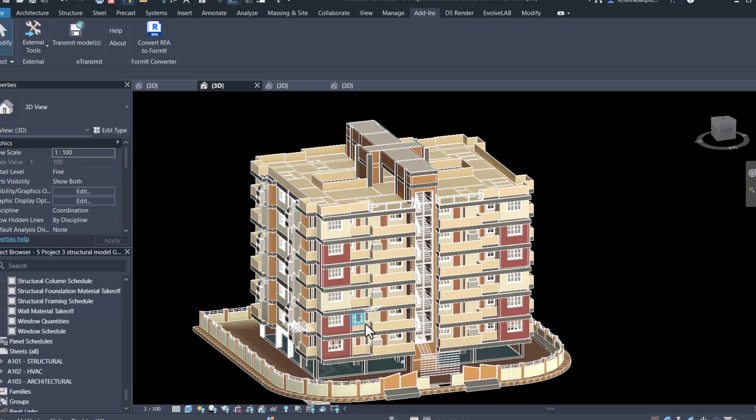You can see a simple building, a G plus 5-6 floors building, right? It looks like a very simple building, but it has a lot of detail inside it. Let's say if I show you over here, you can see that there is a footing, as well as some reinforcement. It gives you such clarity about what type of reinforcement is in this particular footing and what type of footing it is. It's an isolated footing, with PCC and with some rebar as well.

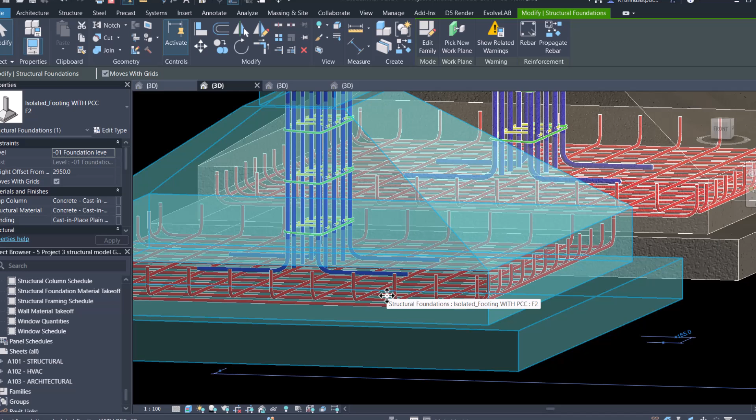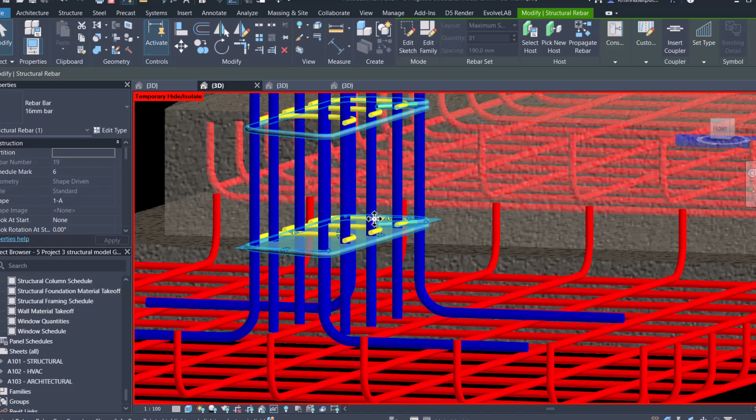I'll hide this part so that you can see it more clearly. You can see the rebar over here. If I select it, you can see that this is a 12 mm bar, with a specific color. Then this is again a rebar, a 16 mm bar. What are these? I will make this into a section box so that you can see more clearly. Have a look. These are all stirrups, 8 mm bars, or these are 16 mm bars, but with different color coding.

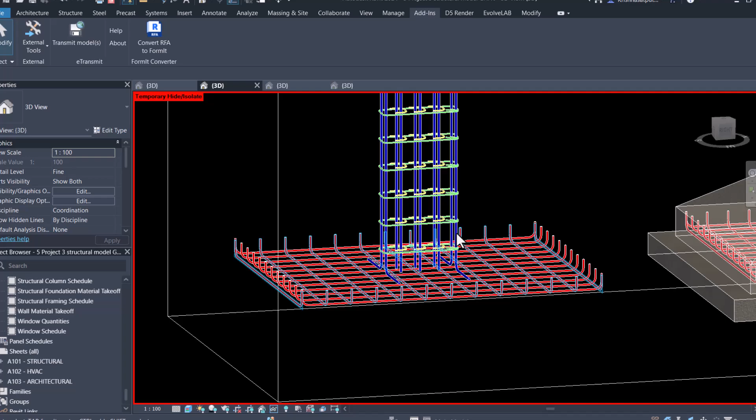So this is how you have to define it if you create any BIM model or BIM project. You need to make everything in such a detailed way that the employer knows your skill set is really applicable in the industry. It's not just a 3D model, it's a model with all the details mentioned. So let's look at this 12 mm rebar. You can even put in details like steel bar or steel bar footing base. There are so many details you can mention about any single object.

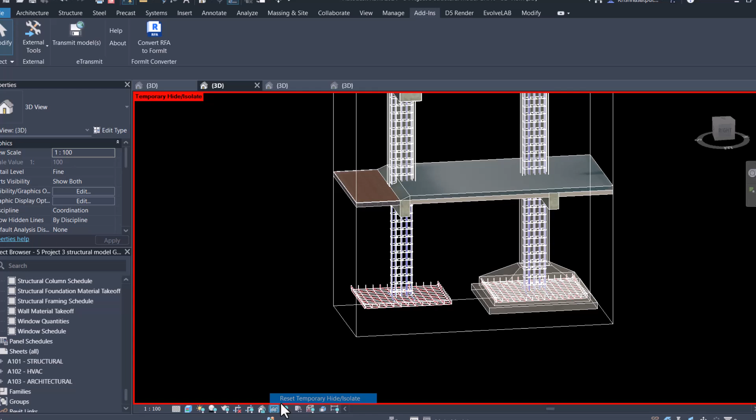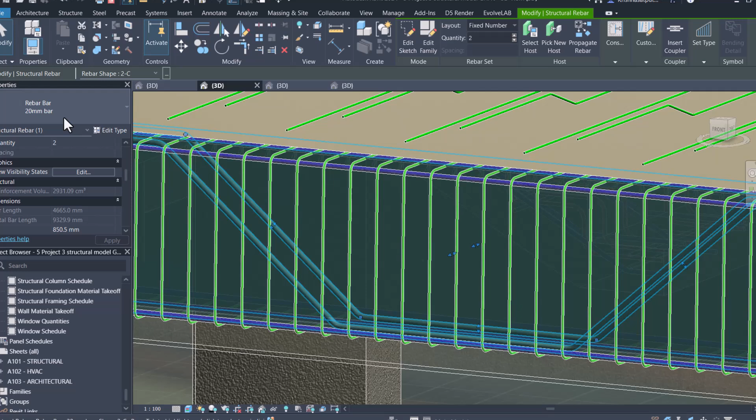Now let's look at more details in this project. I will come out of this section box. You can see there is a boundary wall, some railings over here. Then there is a beam with proper detailing, proper modeling of the reinforcement. You can see the vertical and horizontal reinforcements, and the bent up bars very clearly and precisely. If I select this bar, it shows it's an 8 mm bar. This one is a 20 mm bent up bar. If I click on this element, I can even see the size of this rebar.

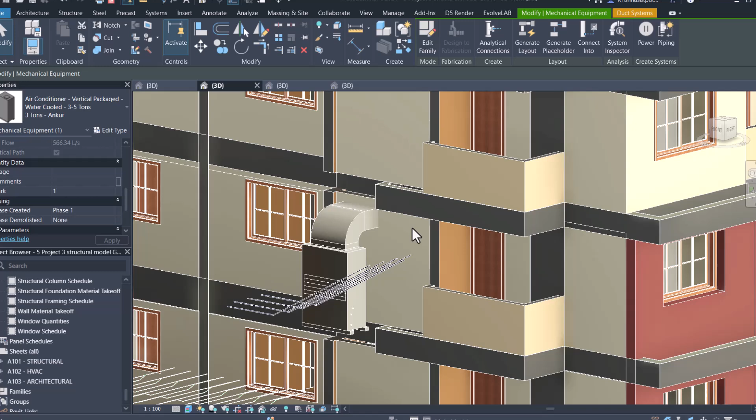Then over here, I can see that there are some ducts as well. Air conditioner, vertical. This is also a duct. It's an elbow. This is a rectangular duct. So these are the things you might need to show in your project, like the reinforcements and elements properly modeled.

If I want to see only the structural part, let's switch off every element and show only the structural part: foundation, column, framing, and the rebar as well. I'll switch it on. Now you can see only the structural part of the building, including the reinforcement rebar. You can see the staircase and the reinforcement in this staircase. Let's make it into a section box.

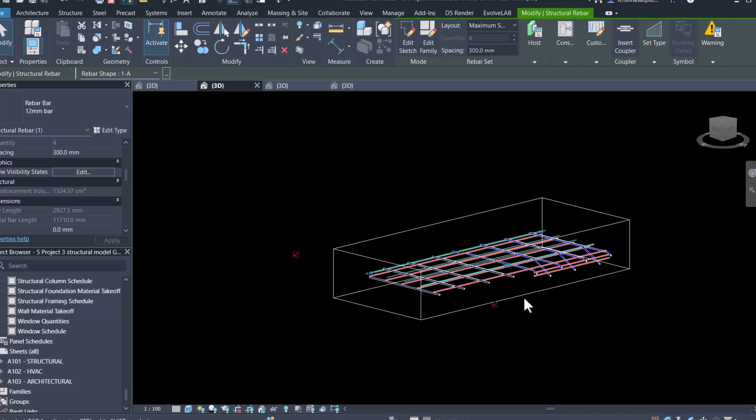You see how clearly the things have been defined over here. So in order to make a really BIM project where you are going to showcase all the details, these details are not directly embedded in the project. These details are readable from a CAD drawing.

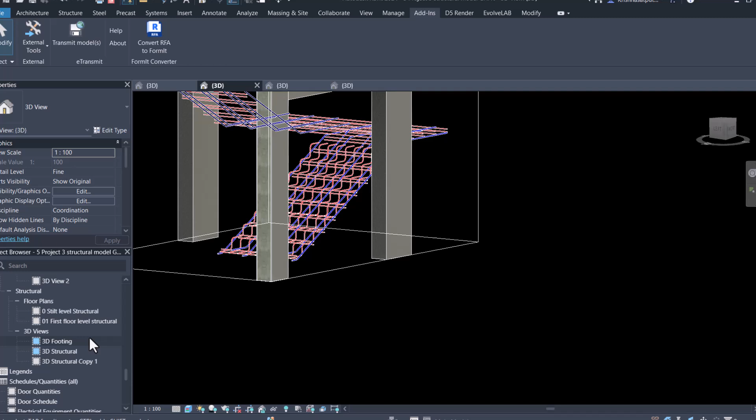So once you have a CAD drawing, the student who made this particular project used a CAD drawing to make the staircase, the reinforcements. After achieving this particular project, he has also carried out some sheet creations. So let's have a look over here. Look at the different types of sheets he has created. The structural model over here, the footing, the beams.

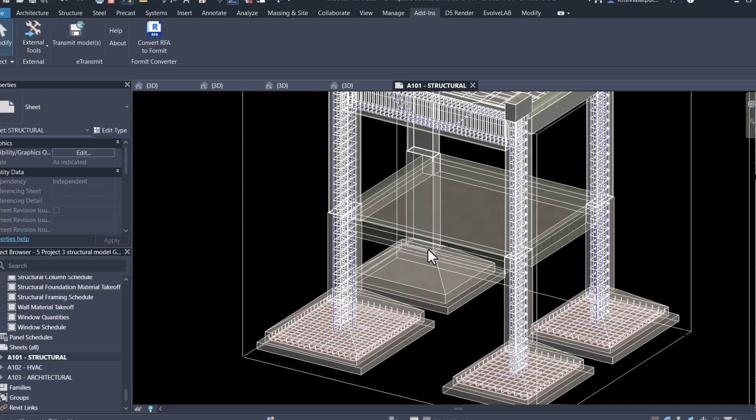Can you switch off your video at the moment? I'm hearing some noise. Vishnu? Okay. Please keep your audio off so that I can hear it clearly. Once we finish the session, we'll have a Q&A session to interact, and I will love to answer your questions regarding the session today.

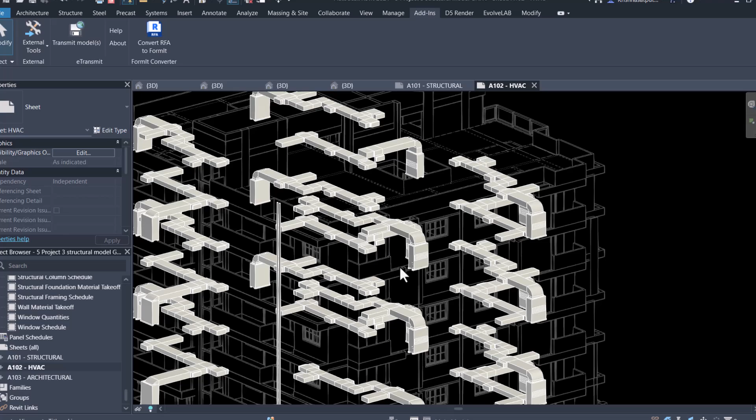Then there is an HVAC sheet also, where he has shown how the HVAC is being distributed inside the building. He might not have shown the entire thing, but he has shown enough for a person to understand, this is how the HVAC looks, this is the design, this is the elbow, this is a rectangular duct, there is piping over here. He knows how to model a pipe, he knows how to give the connections, the joints, WC, U-trap.

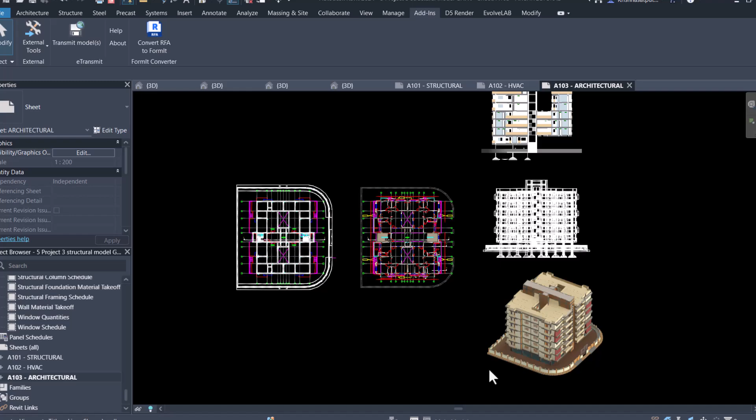Then over here he has also included some sections. Then have a look at the architectural plan. Now this is an architectural plan where he has shown the elevation, 3D view, section, the plan views, each and every detail, right? So this is an example of a simple 3D model which you can make using a software called Revit, right?

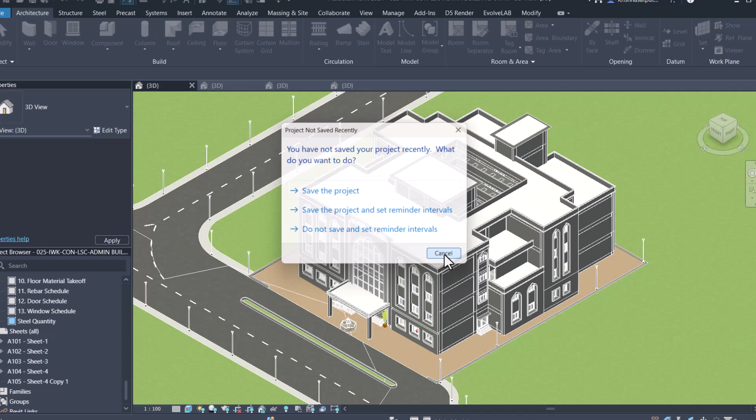Let's look at some more detail of what it can enhance. Let's look at this particular project. In this project you can see that it's not just a building over here, he has also showcased the landscape around it. So there would be a particular topography of this area, then there would be a road which is connecting, there are street lights, there is a waterfall, fountain over here in front, and there is a ramp, a staircase, some plants. If you need to show some humans, you can do that too.

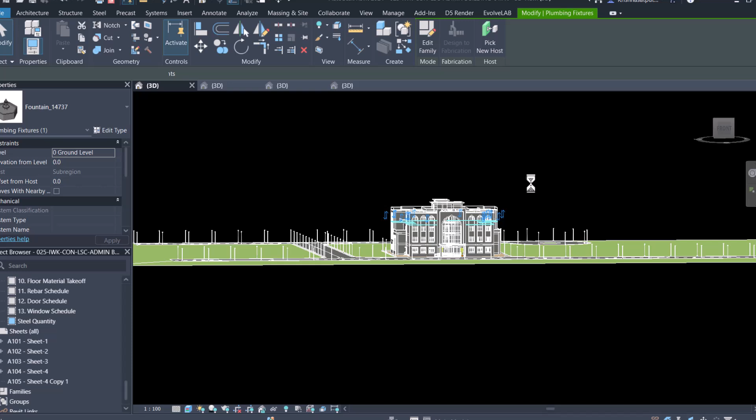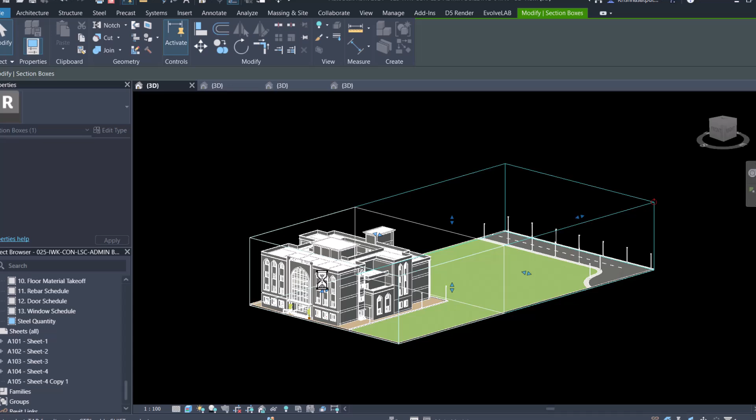I'll make this particular building into a section box and help you see it more precisely. Let's have a look over here. The section box. Okay. You can see in this building that there is a facade over here, some design on the front side on the elevation. There is a curtain wall with proper mullions and grids.

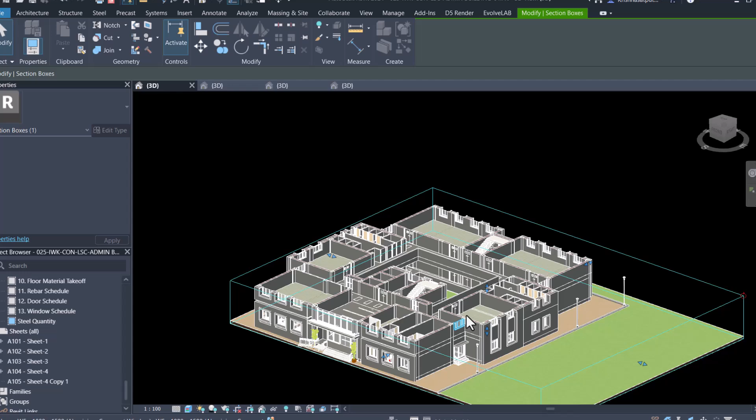Now let's look at the rooms inside this particular building, what details are being shown. I'll crop it down a little bit more. Okay, good. So let's have a look at this particular room. He has properly shown what details are there, that it might be an office room. He has used a family, a table or a chair, some things over here which can be arranged on a table, a simple office chair, a sofa, a table for the flower pot or the vase.

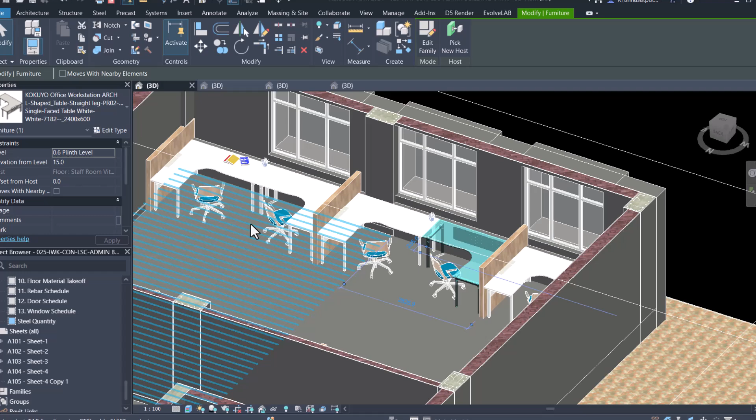Then let's look at the other details. This is again maybe a training room or office room where employees would be working or students would be learning something. He has made some tables over here. If you cut this particular section box from the bottom, let's cut it from the bottom and look at the top. What's there in the top? Let's look at it from this side.

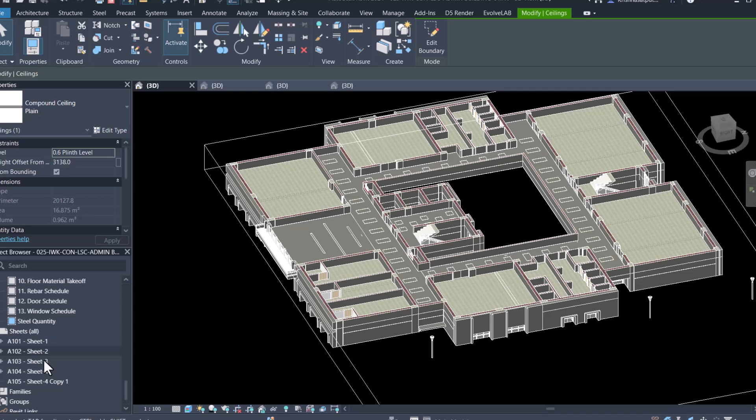Some of the places have a plain ceiling, some don't have a ceiling. Okay. Let's look at the sheets. You can see the detailing over here, the way he has modeled in this Revit software. It's not just a 3D model, but he has shown what details are there.

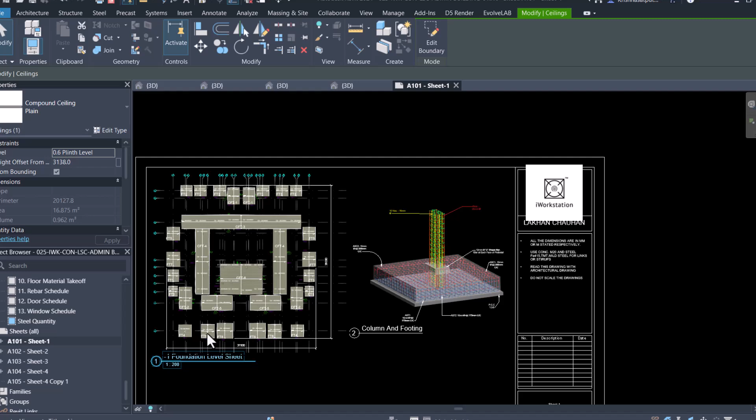Let's say this reinforcement: what is the number of reinforcement, what is the size of this rebar. U-shape rebar, 1 bar at each face of pedestal, ASC 110 mm. So these are all the information contained in this particular drawing. This is a sheet over here with the name of the student. Let's look at the other sheet.

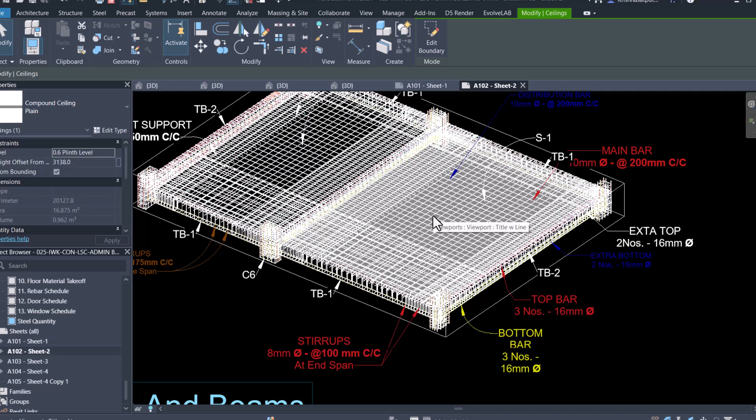So it gives a strong impression that the student, or whoever modeled this particular building, is highly skilled in understanding how to give the information, what information needs to be given. Okay. So let's look at sheet 3, the kind of information shown over here. A simple staircase 3D section.

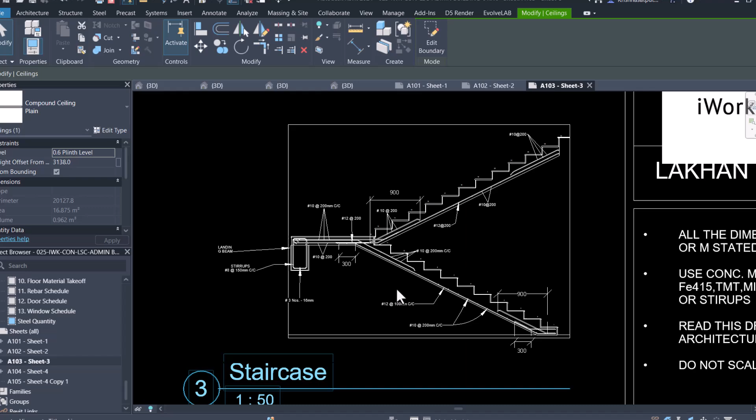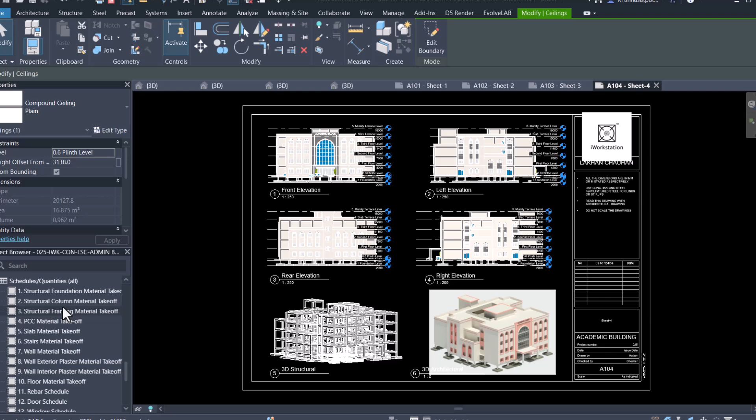Let's say the PCC material takeoff. So what is PCC? Plain cement concrete. How much material will be required in the entire project over here? This is the final amount of cost of concrete and even the cubic meters of concrete.

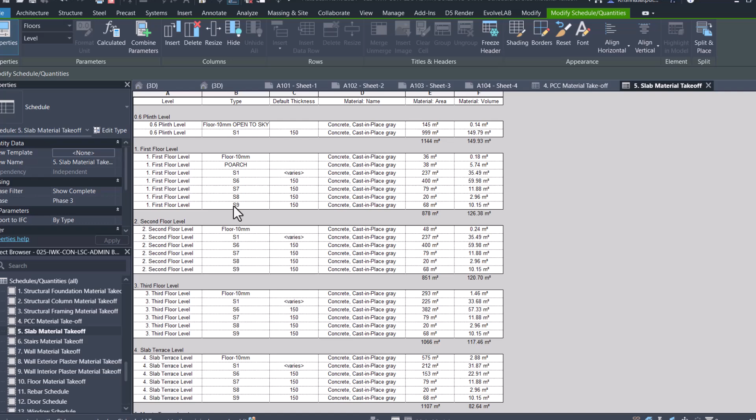Okay. Let's talk about the slab. Each and every floor has a different slab. Maybe the first floor has 150 mm or 125 mm, different sizes of slabs which you can see over here. And then at plinth level you have a different slab. And what is the volume of it, and subsequently you can calculate the cost of it.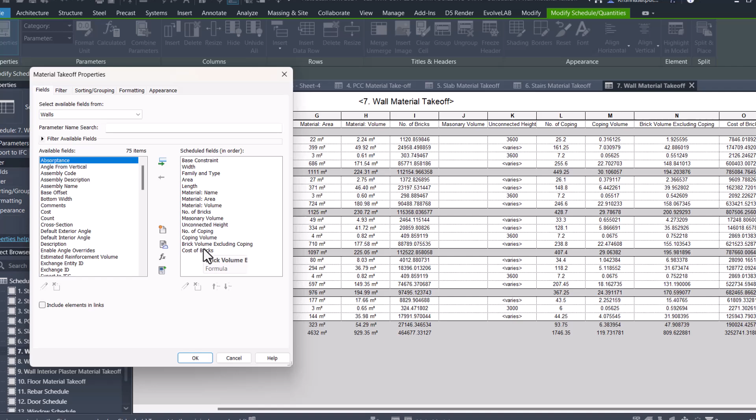So have a look over here, coping volume. This could be the formula. So in order to get these kinds of quality deliverables, you need to understand how to set up the details, how to set up the formulas in each and every deliverable. This is for brick volume excluding coping, number of coping, and the cost of brick.

So he has multiplied the number of bricks by 7. That 7 is Indian rupees; the cost of one brick he has considered as 7 Indian rupees. Maybe in your project you might have 12, 4 or 5 Indian rupees, depending on where you are working, which type of project, which type of brick you are using. So these kinds of details need to be shown in your project. Let's have a look at another model.

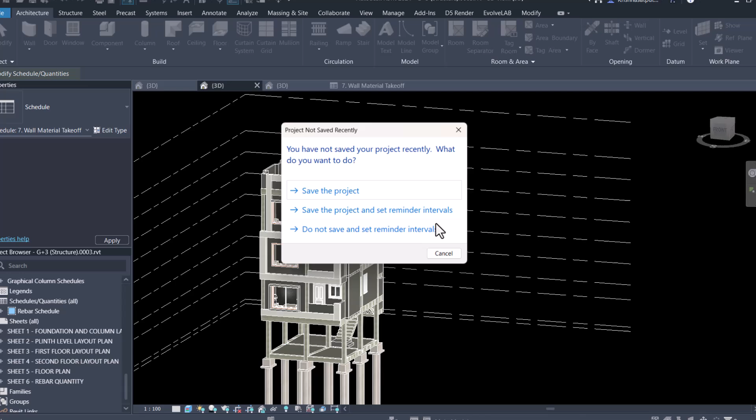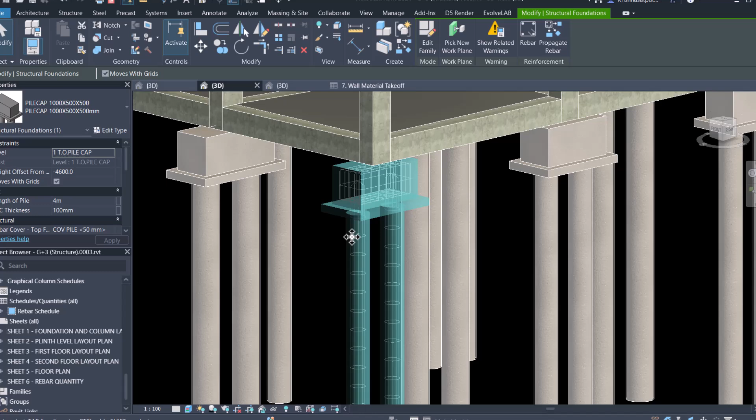This looks like a very simple building. It's G+3, ground floor plus 3 floors, but you have to model a particular element - a pile. This is not a simple element. Many people know how to model a simple rectangular or isolated footing, but you also need to know how to model a pile footing.

Sometimes there may be a project where you have to model a pile footing, so you cannot tell employers you don't know what a pile footing is or have never modeled one. You should know where to get the family for this pile foundation, or even if you don't know, you should know how to make it. That's the least you can do.

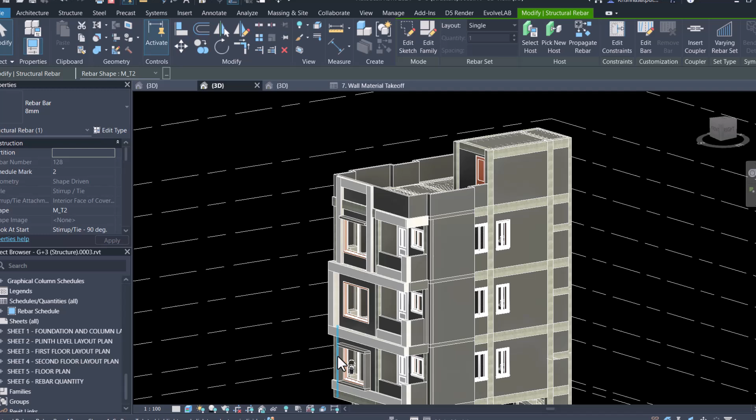You should know the basic commands of making a simple extrusion, a blend, or a revolve. These kinds of tools will really help you stand out in the project. This G+3 building looks very simple, but if you look more closely, I'll help you understand the complexity by showing you the rebar first.

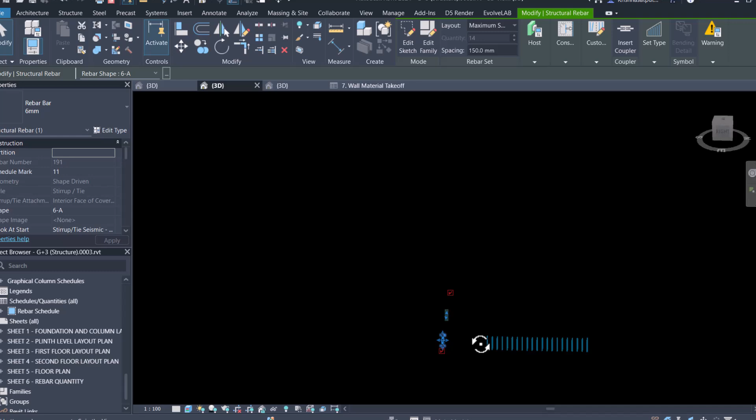Let's see the entire building. The rebar modeling has been done here - you can see the entire building properly modeled. Using the data provided, we made a structural reinforcement for the entire building, including the pile foundation, footings, beams, slabs, staircases, each and everything here.

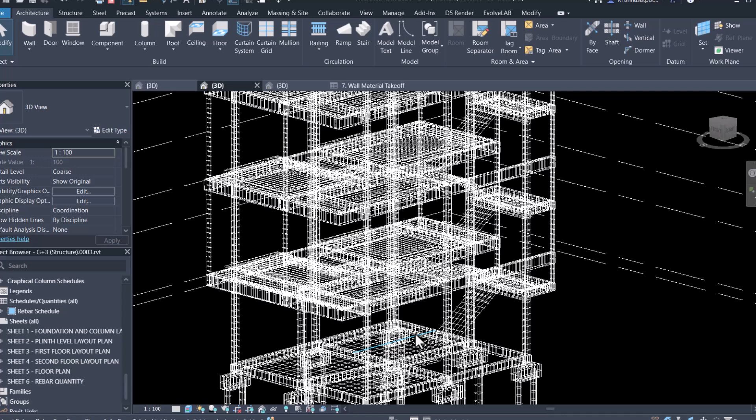And ultimately you have calculated the rebar schedule. In the schedule you can see the total quantity of steel in kg here.

I'm going to show you some of the sheets as well, which is again a deliverable. In the last few sessions you might have seen what a BIM portfolio is, how to make a video resume, or how I shared creating templates using Canva. But you cannot do those things unless you have a proper project with you.

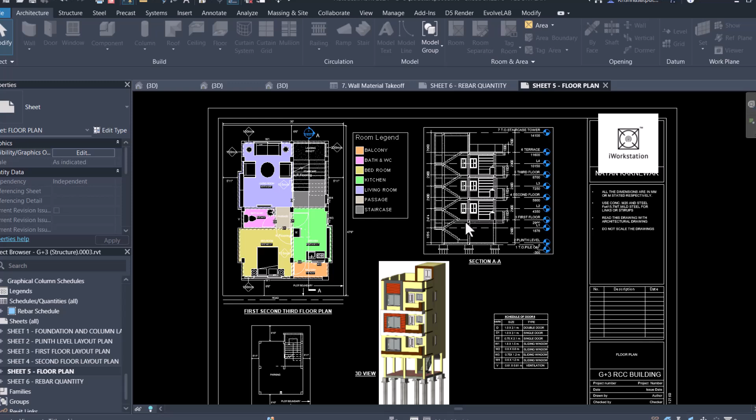So in order to have a proper project, you need to know how to put in these details in your sheet, how to showcase these details properly, how to extract these as a deliverable. I'm going to show you the second floor and the first floor here.

Have a look at this detail of a staircase - so structured and easy to understand what details are there about the rebar. The objective of showing these details or deliverables is not just to showcase how the sheet looks or how organized it is, but for the employer to understand that you focus on small details.

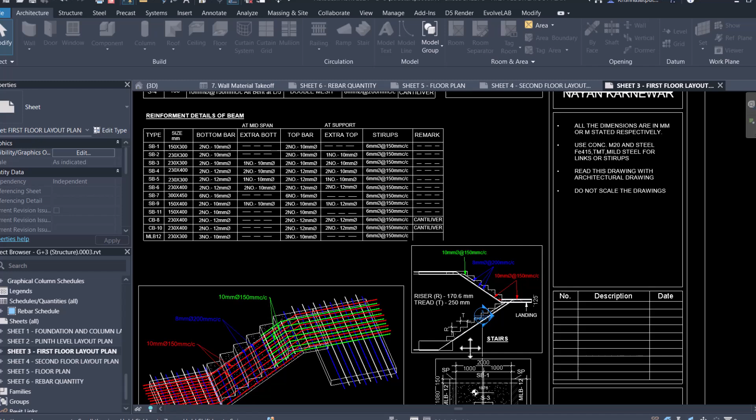These small details, very neat and tidy, help the employer qualify you as a skilled resource for his or her company. If you can showcase these kinds of details in your project portfolio, the chances of getting hired tremendously increase. That's another task - how you apply to the company, how you showcase your details. But first, you should know how to have these skills.

How to showcase these kinds of skill sets - let's have a look at this pile foundation with proper reinforcement detail here. These are a few of the Revit skills each and every one of you must know in order to be a good BIM modeler first.

Then later you can be a BIM project engineer, a BIM coordinator, a BIM lead, or a BIM director. As the level increases, the kind of responsibility also increases with that. Okay, so let's look at this particular project.

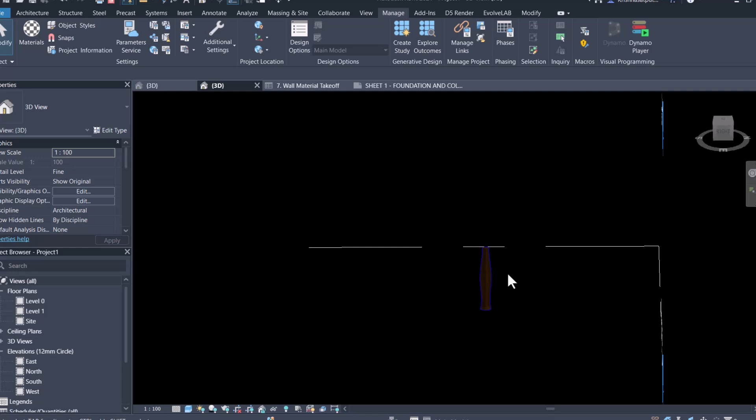What you can see here is a simple structure - looks like this - but what I'm trying to show you in this particular structure is something called Dynamo. This Dynamo is particularly a software tool which is embedded inside Revit.

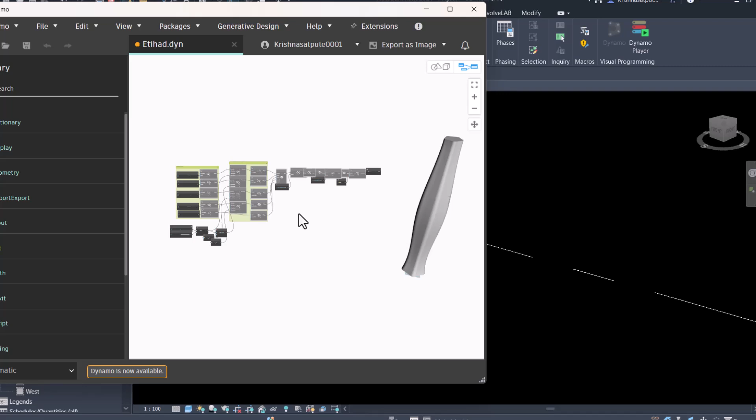Many of you might have used it, some of you might not have even looked at it - there's a tool called Dynamo. Before, in 2016, 2014, this Dynamo was a standalone version, not a product of Autodesk. Later Autodesk acquired this software tool, and people have started using Dynamo extensively right now for modeling, for creating automated design options, and for automating any deliverable you can produce from a simple Revit model.

So as I showed you these quantities, what if I tell you that Dynamo can automate this entire process for you directly? Even if you don't have a template, if you have a small Dynamo script that takes the proper filters, puts the proper formulas inside it, and you run the script, it will give you the exact quantities like this.

But for this you might have to spend 30 minutes to 1 hour to 2 hours to get the right kind of deliverable. If you use a Dynamo script like this, it can help you even extract the sheets from your project, and it can even help you do the tagging for your sheet. There's so much tagging, dimensioning, and arranging of the sheet that can be automated using Dynamo.

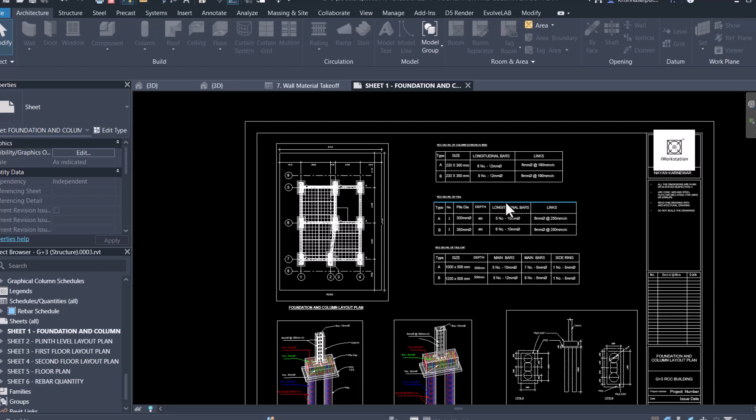But how can you automate it? The first thing is you should know how to do it manually. Then the second step would be to know how to do it using Dynamo or automation scripts. If you don't know how to do it manually, you won't be able to understand how it can be done using the automation tools.

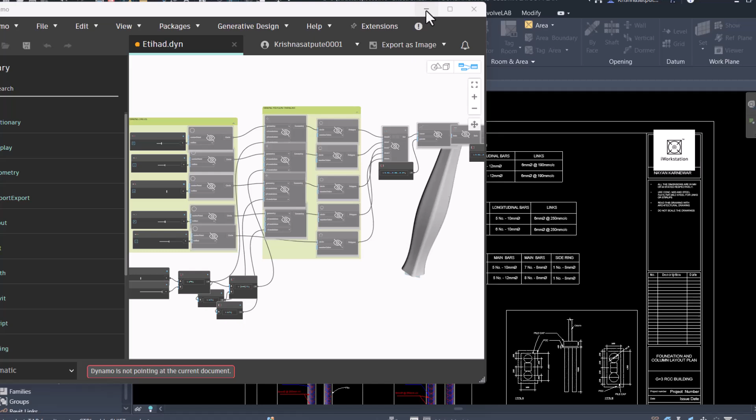Okay, let's have a look at this particular script. I need to point it to Dynamo first. So this is the Dynamo file which needed to be open. It looks like a very simple building, a simple structure, but what I want to showcase is this script over here. It has different radiuses at different angles each.

Look at this particular shape. Look at the shape behind and look at the slider over here. If I move the slider for mid-low radius, it is also changing the shape in Revit. At the same time, it is changing the shape inside Dynamo.

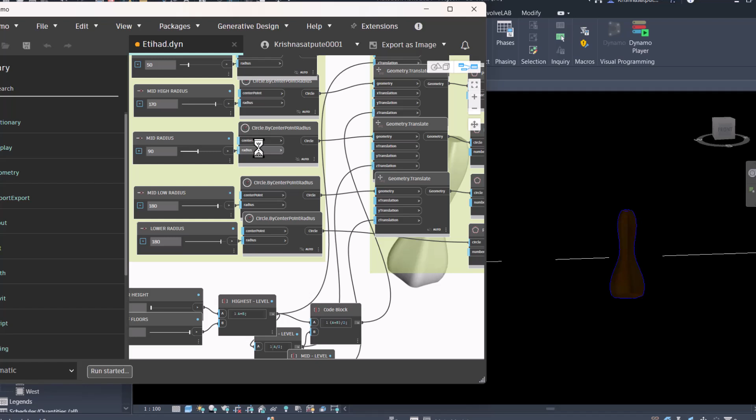So this not only helps you tweak the design options for you, but also gives an idea of which design option would be better for your company. Maybe the client doesn't like this particular design - okay, you can choose a different design option.

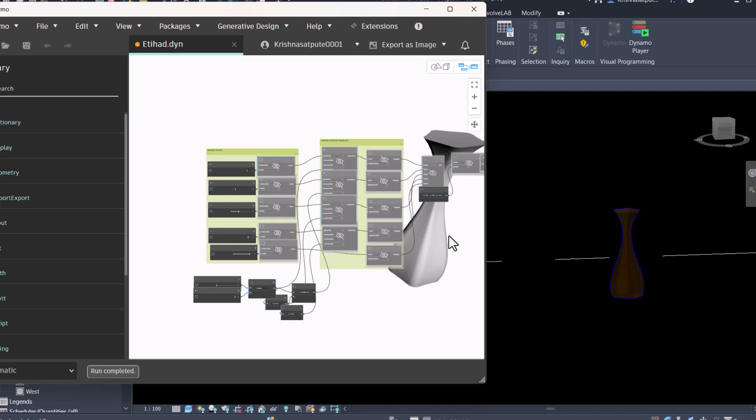In this example, I have just shown a small simple shape which has some curves around it, with some radius at different levels. But imagine if you can tweak this particular script with a proper building, what kind of details and what kind of information you can get from it.

I'll change it to some normal size. Have a look like this.

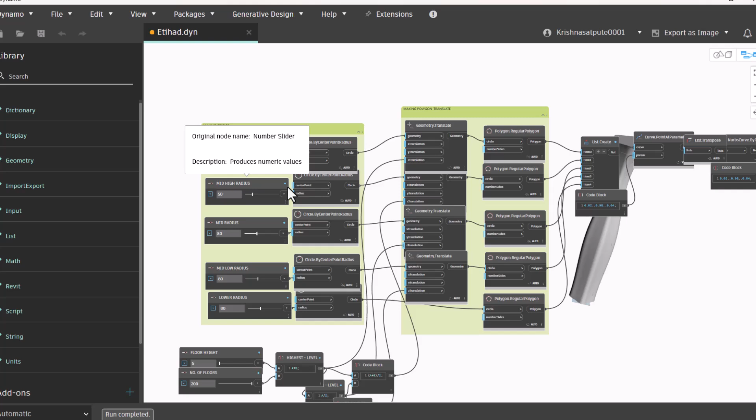So this is Dynamo, which most people in today's era are using, already practicing, already learning how they can implement it in their project workflows. Very soon you will be looking at lot of vacancies on LinkedIn and Indeed or any job portals. They are hiring people who know BIM along with Dynamo scripts, along with Dynamo knowledge, because modeling something is pretty easy in the industry right now.

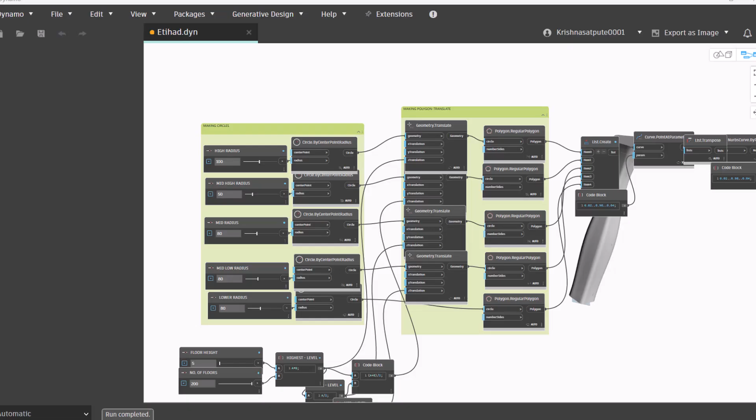Not many people are getting skilled in this domain, so very few people really know how to do this kind of automation in their particular project. So what I want you to focus on is not just the modeling skills in Revit, but you should also start learning about Dynamo.

How you can make the scripts, how you can tweak the changes, what are the packages inside Dynamo, how you can effectively use the Dynamo player, how you can automate simple tasks in your Revit project, like taking out quantities, or creating rebar or reinforcement inside the building on a footing or a beam or a column. So these kind of small things you need to take care of.

Now another software I am going to show you, which is quite popular in the industry, is Navisworks. Over here you can see this particular building - it's just an academic block, the same building. I will just unhide this. Yeah, it's a simple building over here.

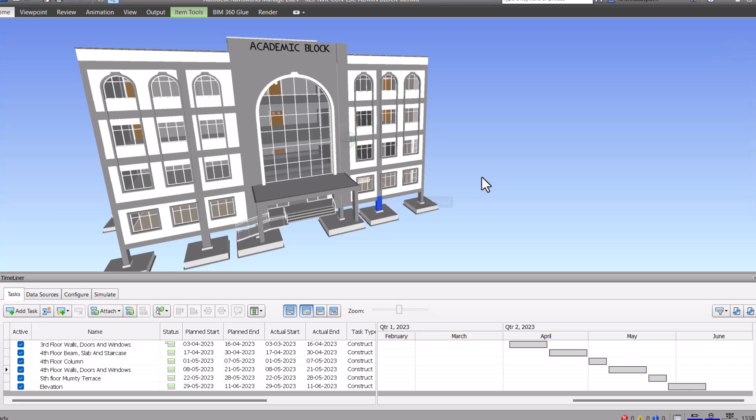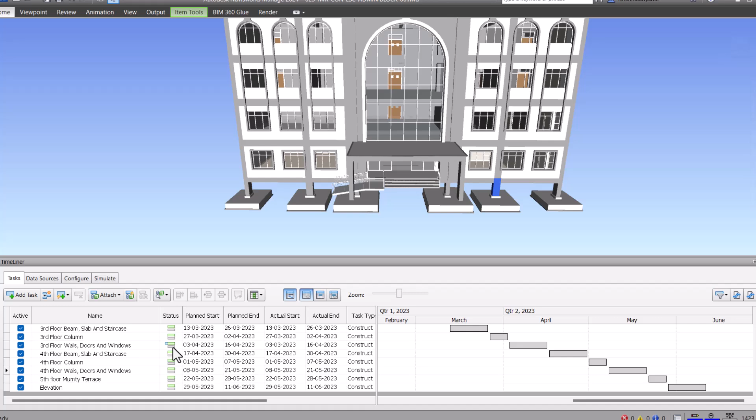It's a Revit project embedded inside Navisworks, and on the bottom side you can see the timeliner function is on. So what is this timeliner? Timeliner helps you simulate this entire building with respect to time and cost. That is what we see in the industry as 4D BIM or 5D BIM—nothing but the aspect of time and cost. So how do you define that time and cost aspect with respect to a BIM model?

Imagine this building being modeled in Revit, and on the left side you can see all the activities in this particular building—execution of PCC, creating a footing, a column, plinth column, first floor level column, slab or staircase, lots of activities you might have in your entire project. So you can simulate this entire thing using a simulate option over here.

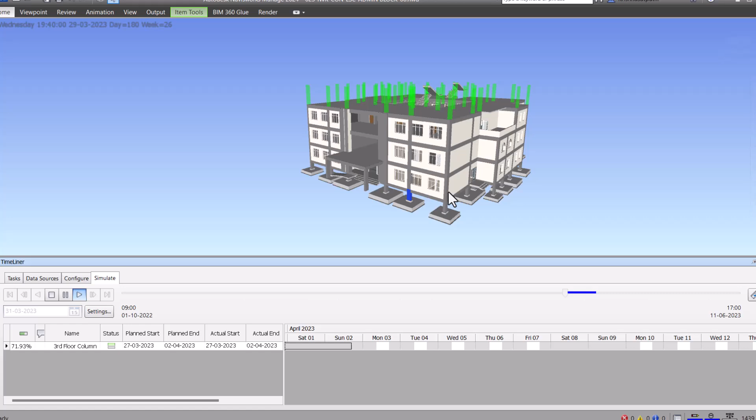In this session I am not going to show you how to actually make this kind of thing, but I am going to show you the deliverable out of it—what exactly people need you to know. If you are using Navisworks, you need to know how to make a simulation like this. You can see the particular building getting simulated with respect to time on the left side.

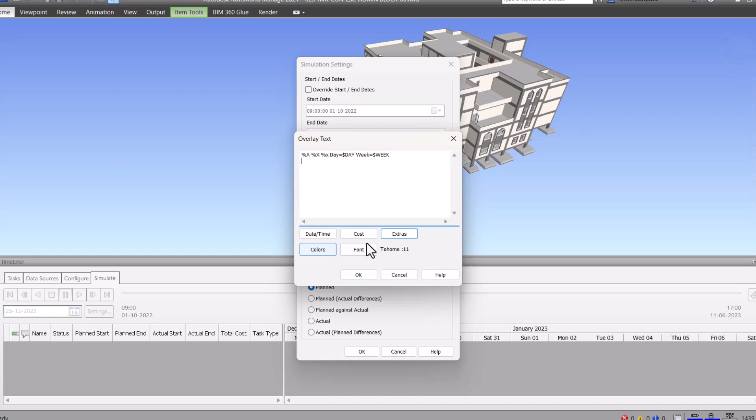I will take it back. On the left side you can see the time. If I go to the settings, I can even overlay the activities which is there over here. Let's put some currently active task—now you can see the activity name as well. What is happening at the moment is execution of PCC. How much percentage has been completed? 76%—column, plinth beam, and slab staircase construct.

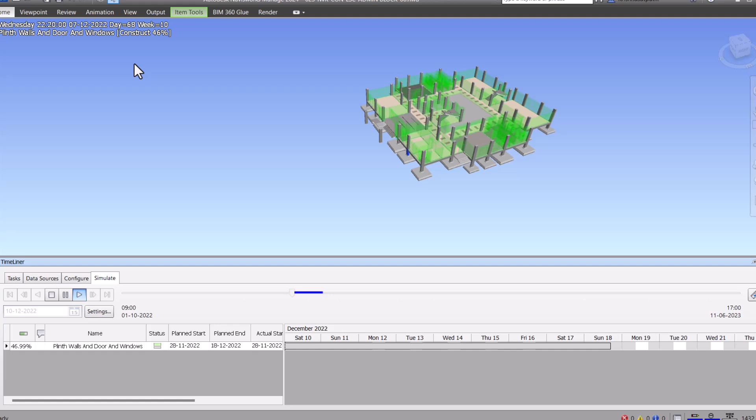So these are the phases like construct, demolish, or temporary—different phases. You can also include the cost factor inside it. Currently in this particular project there is no cost factor included, but you can also include the cost factor if you overlay a particular cost command in this overlay text.

So this helps a project manager understand the current status of a building, how much work has been done till now. It helps you identify planned versus actual—what is the planned status of the building and what is the actual status. Maybe the planned status is suppose this much, and the actual status is this much. So it helps a client, an owner, or a project management firm to visually understand the status of the building at the moment.

Many people, instead of using Navisworks as a tool, before have been using Primavera as a project management tool. Using Primavera, people were able to manage their project time, cost, and scope—basically three ingredients you need to manage as a project manager.

So what is this over here? Now there is also the same traditional way of workflow. People are still using this particular software, but that doesn't mean this software has become obsolete. So this software has quite a number of uses in the BIM industry as well.

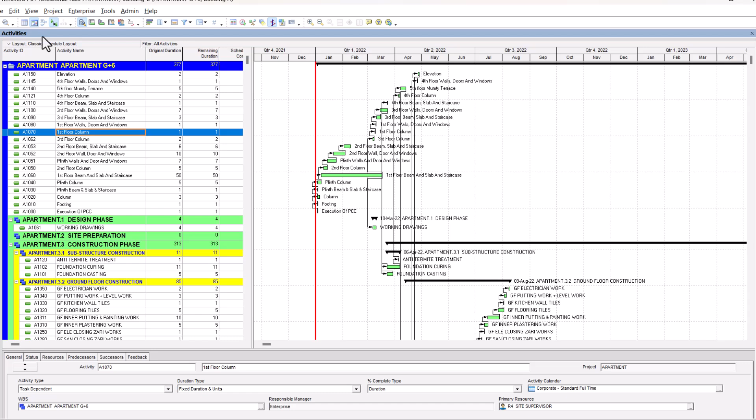If you know Primavera, or even if you don't know how to use Primavera, but you know how to open a Primavera file and extract data or information from Primavera to an Excel sheet or Microsoft Project—very simple—and use that data in Navisworks to create a 4D, 5D simulation effectively, that is the skill set required. You might not need to know all of Primavera, but you should know how to use data from Primavera using a proper workflow.

The same thing applies with AutoCAD. Many people in the industry don't know AutoCAD, and some training institutes—I'll tell you a secret—say to know Revit, to know BIM, you should learn AutoCAD first, you should take an AutoCAD course first. That is all a waste of money and time, which is not at all required in the industry.

You should know effectively how to open an AutoCAD file in AutoCAD. You should know how to edit some layers inside AutoCAD. You should know how to import and export AutoCAD files into Revit and other software tools. That's the basic thing you should know. Apart from that, you should not focus on drafting or designing anything in AutoCAD, because that is a waste of time.

If you are doing this, or if you are learning this kind of skills in your architectural firm or in your structural consultancy firm, that means you are just wasting your time and your effort, because many people out there are already automating these kind of basic drafting and designing things using Revit or other software tools, right? So some of the tools which have not been obsolete at the moment, you should know how to utilize, but you don't necessarily need to know each and every detail of them.

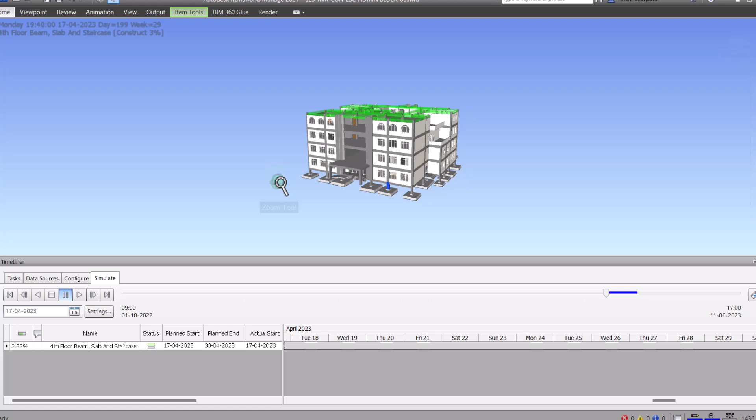So I have given you an example of this 4D and 5D simulation in Navisworks. Another very important feature of Navisworks is clash detection. In this entire building you can detect the clashes. How many clashes are in this particular building? Let's say I'll detect a clash in the ground level. Some clashes have already been detected over here. I can directly look at the results over here. You can clearly see that there are these clashes.

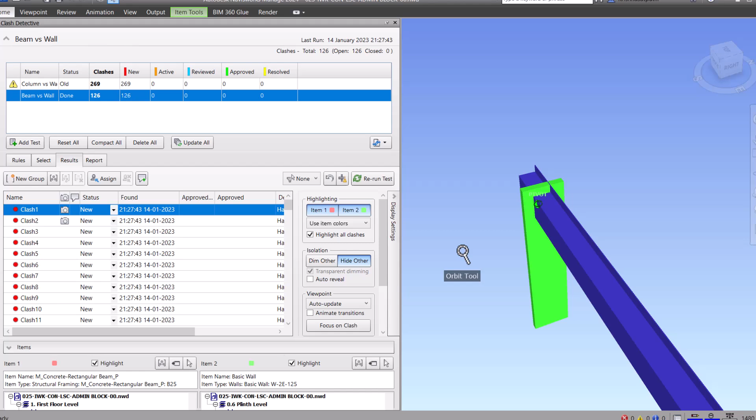What is this particular element? It's a basic wall, and it is having a clash with a rectangular beam. Obviously a wall cannot intersect a beam, right? So this clearly looks like a clash. In order to resolve these clashes, you need to have a basic design knowledge or a basic technical knowledge regarding your field and also the other fields.

If you are an architect, you should also have a basic understanding of the structural engineering domain. You should also have a basic understanding of MEP, that is mechanical, electrical, plumbing and firefighting. You should have a basic knowledge and understanding of what elements are there in the building at least.

Not in a very detailed manner, but at least in a building, from where the pipelines go inside the building, from where the electrical switches or the conduits go, from where the connections of a fan or a light or any bulb or any appliances are, and how the electrical switches or the wiring are laid out. So these basic things you should know if you are coming into the domain.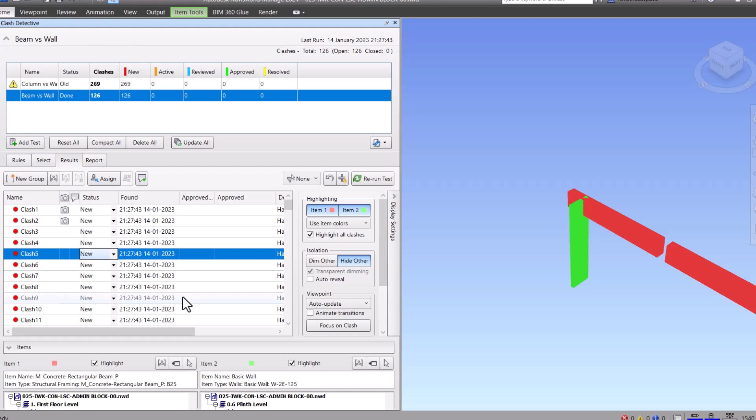Then there are these clashes, which you need to understand how they can be detected, and once detected, you need to know how you can resolve them inside Revit. So detecting in Navisworks and then resolving inside Revit. This is the basic workflow each and every one of you needs to understand.

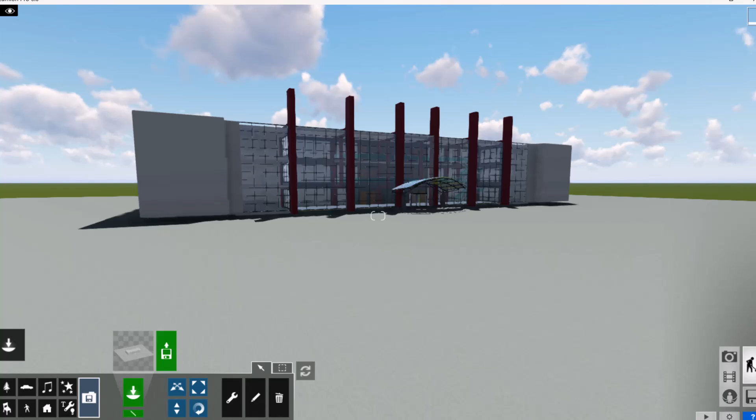Let's come on to something more visual and appealing, which is really helpful for you to visualize your own project, and also to create a realistic walkthrough or rendered views inside your building. This is what is called Lumion. Maybe not many of you might be able to use Lumion because of the hardware configuration which is required, but some of you who have a good hardware configuration can start using it.

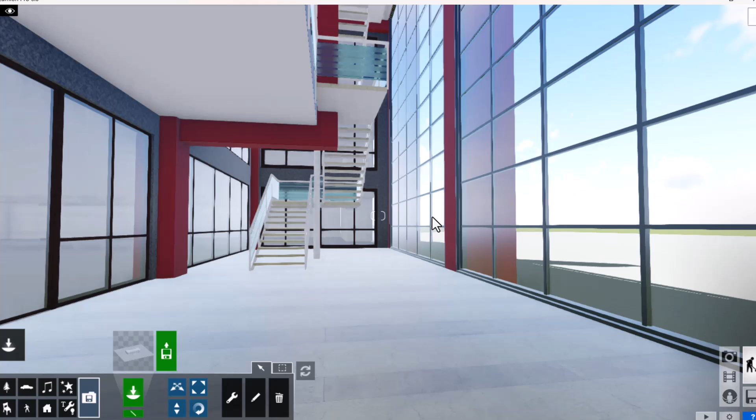And even if some of you don't have a good hardware configuration, many of you have a very good internet connection, like 5G is there almost everywhere, right? So if you know how to work in a cloud-based environment, there are so many platforms through which you can render and create a walkthrough. But what I am showing you is how you can understand this particular software. This is Lumion. And in Lumion you can bring your own projects to reality.

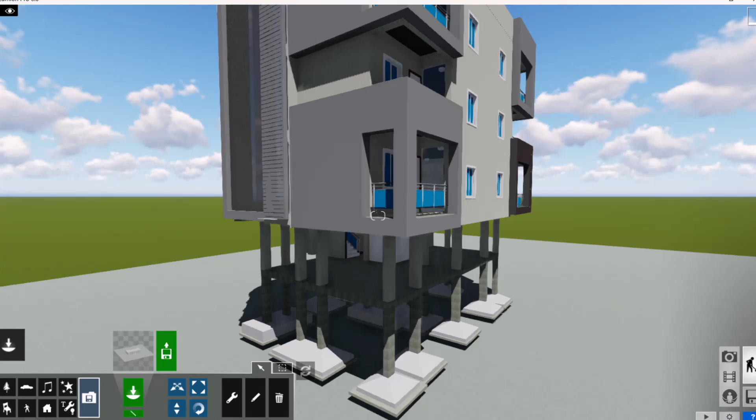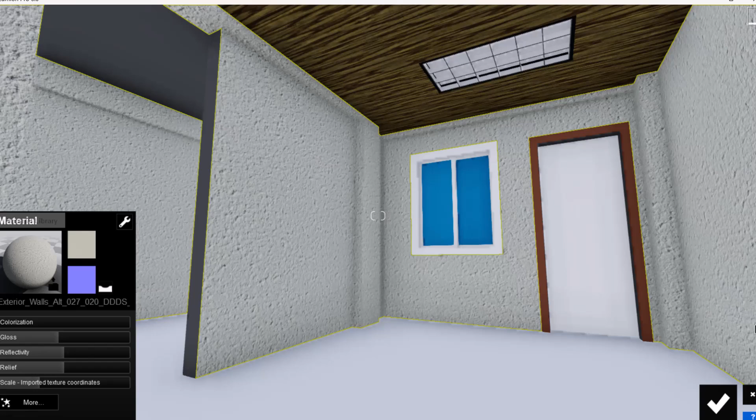Let's say this is a simple building over here. You can build this building inside Lumion. You can create a walkthrough of it. You can change the texture. You can change the material inside it. Let's say this particular room over here, and I want to change the materials of this particular wall. So I'm going to select a material over here.

Any material which is there in Lumion, you can select it, or you can even load it from other areas. Let's say there's a plaster, there's an exterior wall, interior wall, there's a stone material. You can see it's quickly showing the graphics over here. Let's look at the ceiling over here at the top. If you want, you can change the ceiling material as well, the lighting, the glass, the reflectivity.

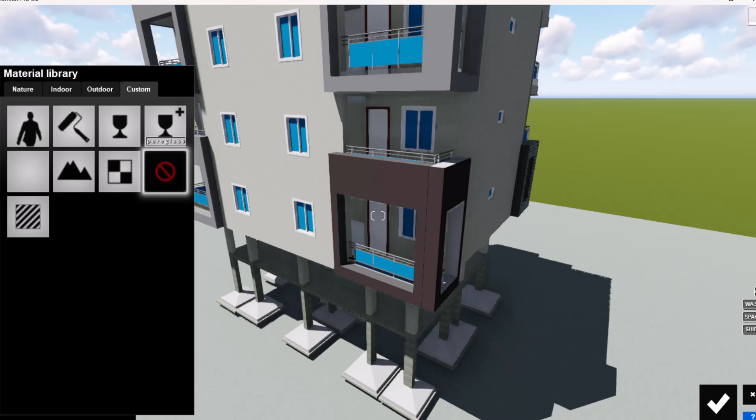Over here you can see the gypsum wall board. I can click on it. Wall plaster. These are the colors over here, which are pre-embedded.

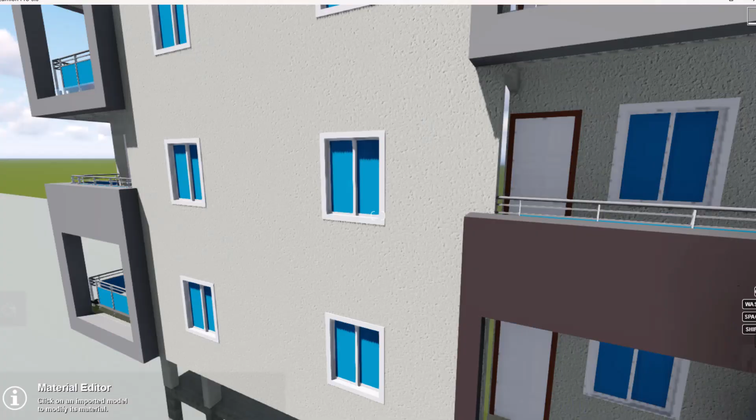Okay. So this gives you a very handy option to effectively make a rendered view, tweak the materials, tweak the settings, tweak the sun directions. Let's say over here there is a weather, right? So what day is it? It's in the morning, it's in the afternoon. What is the direction of the sun? You can see over here, right?

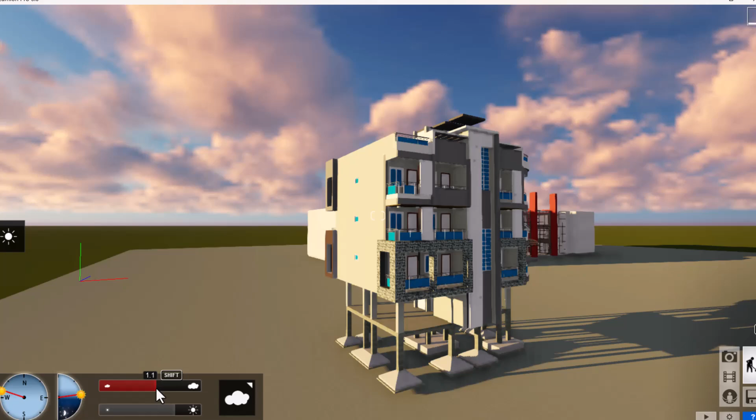If you have a look at this particular building from here, how are you going to look at it? Where the shadow needs to come, how you have to arrange the cloud in the sky. Okay. So everything you can customize. Let's say I use these particular clouds, not too much, this much is enough. I can choose the timing of the day and choose the direction of the sun. Now it's rotating in a particular direction. Okay.

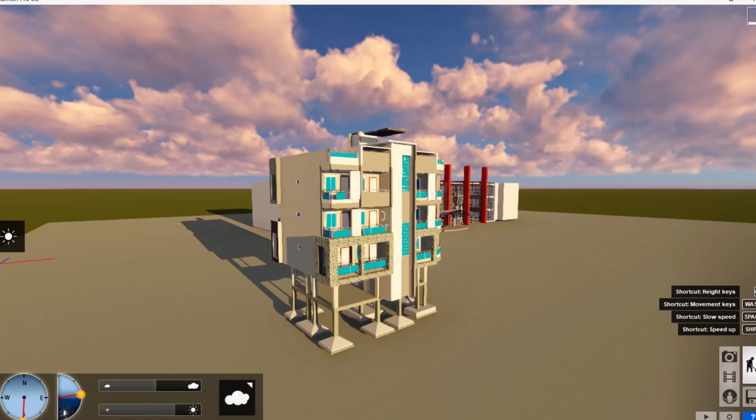And if you arrange one particular spot, then you can just take a photo out of it. You can define which size of the photo you want. You want a poster photo or some other photos. You can take a clip from here. You can even build with some effects over here. There are so many options which you can do. You can even make a movie out of it.

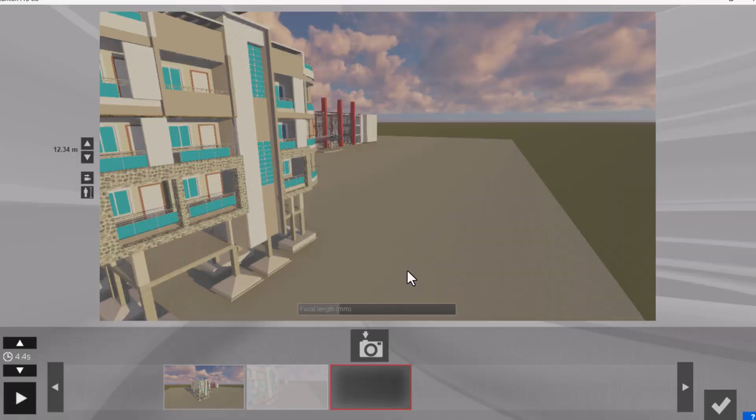Let's say if I click on record over here, I'll record this particular part. Okay. Then I'll go over here, record another part, go over here, record another part, go inside, record another part. Click on finish. I can see the entire movie over here by just playing it. Okay.

I hope all of you understand that this is the functionality of different software tools and how we can use them. There are more software tools. Obviously in this session I cannot explain each and every software tool used in the industry, but some of the tools which are widely used, what type of deliverable you need to extract from them, what the industry is expecting from you. This is what I have tried to cover in the session today.

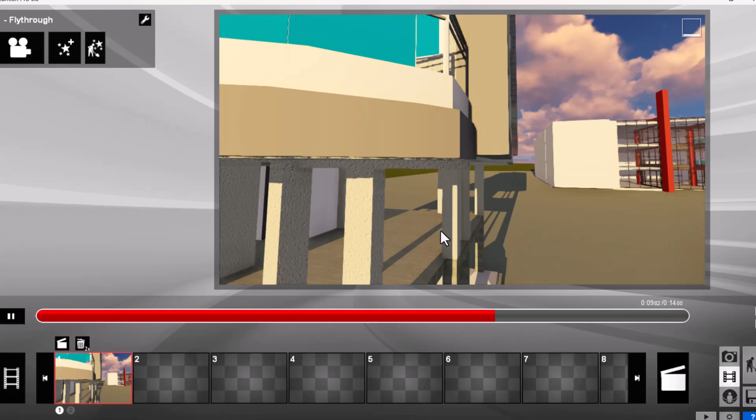Let's go back to build over here, and this is just a simple Revit model. Okay, so you can bring in each and every model from the import section over here, but you need to have a proper plugin in order to bring these kinds of models in. That is called Revit to Lumion Bridge, a simple plugin which can help you bring the Revit model into a Lumion environment by converting the file type from .rvt to .dae or Collada file, which is widely used for making a rendering or walkthrough in Lumion.